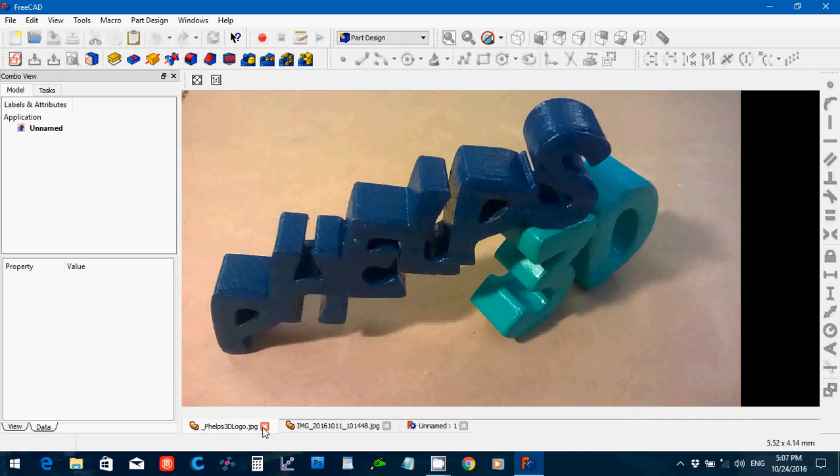Hello, my name is Peter Phelps of Phelps 3D, and in this FreeCAD 0.16 tutorial I'm doing another lesson out of another Solidworks book. This is Engineering Design with Solidworks 2012 by David C. Planchard and Marie P. Planchard.

And we're starting off with the guide rod assembly instruction. Now I'm going to break this up into 3 videos because there's 3 major parts of this, and I just want to show how to design each piece individually for right now. Now I am going to be taking a few liberties with the actual project because there's some stuff that absolutely doesn't make sense to me in the book.

Like, for instance, page 1-64, it's talking about a second fillet that's 10 millimeters, but the width of the item itself is only 5 millimeters. I don't know how to make that happen. Because technically speaking, if I go over 2.5 millimeters, if I even make it 2.5 millimeters, FreeCAD's going to have a fit. It's not going to work. So I'm going to probably set that to like 2 millimeters.

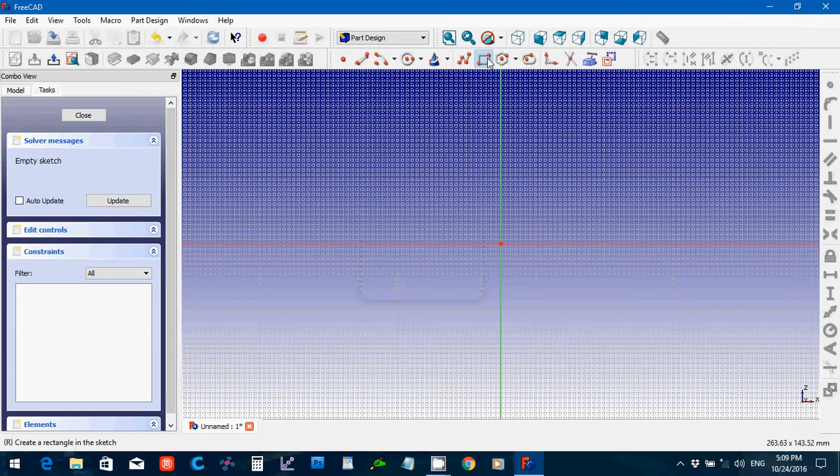Now, this plate is the first part, and its instruction began on page 1-57. And so I'm just going to do this the way I would here in FreeCAD. Create a sketch. I'm in part design. I'm going to do the XZ plane, say OK. I'm going to create a box here. And I'm going to sketch 3 circles.

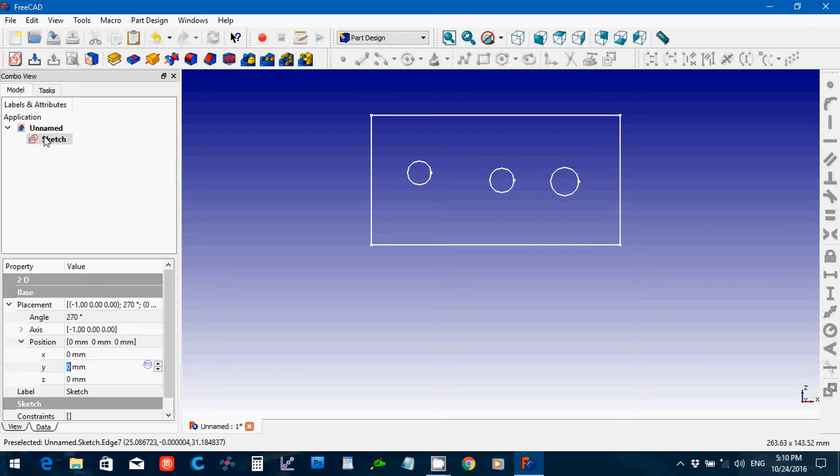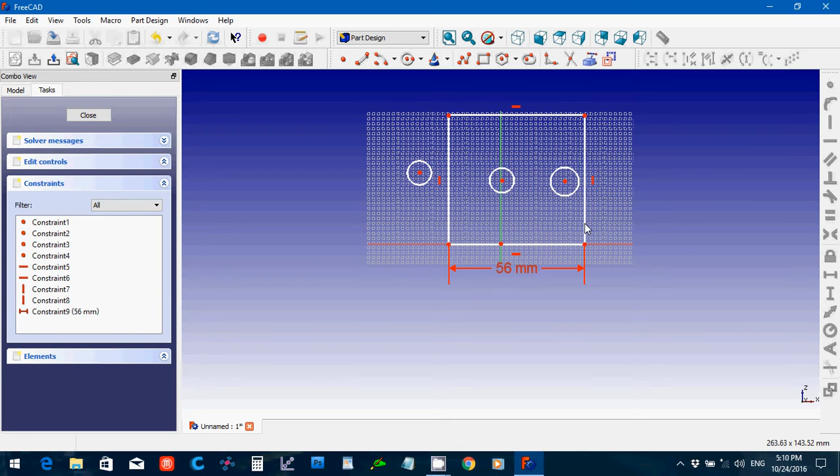Whoops. Double hit the escape. Okay. The length of this is 56. The height of the box, I made it way too big, is 22. I'm going to take and pin that to the plane.

Sorry. Not the line. And I'm going to give that symmetric. I'm going to pin this one to this. I'm going to change its radius to 4. Actually 2. I want it to be 4 in diameter, so 2, sorry.

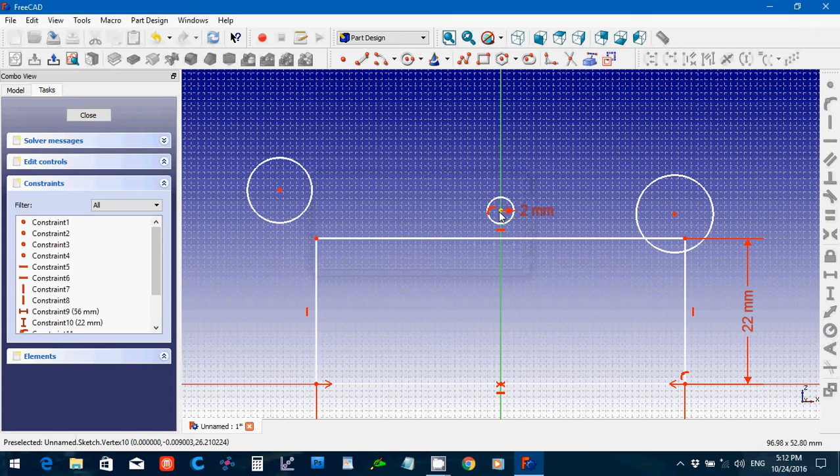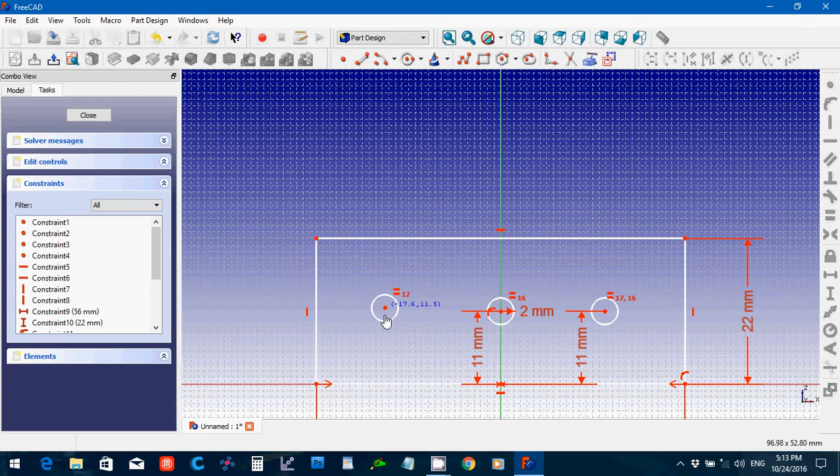Now I'm going to set that one to 11 millimeters in height. And I'll select it, select the other 2 circles with the control. Make them equal. Bring this over here. This, make it 11. Make this one 11.

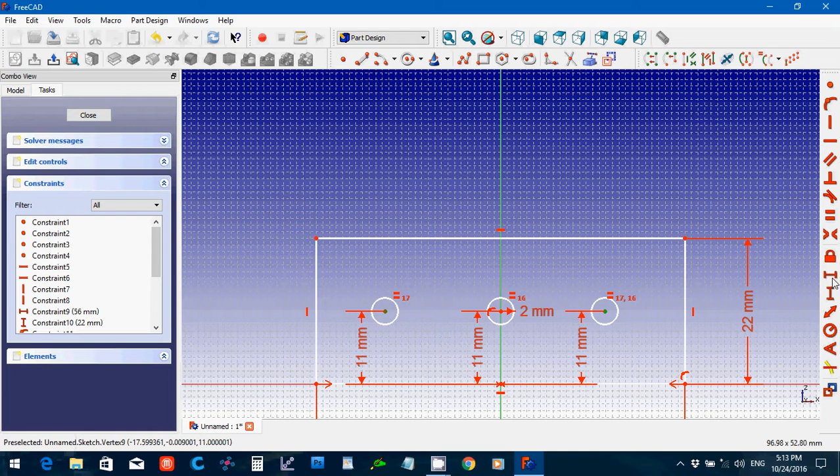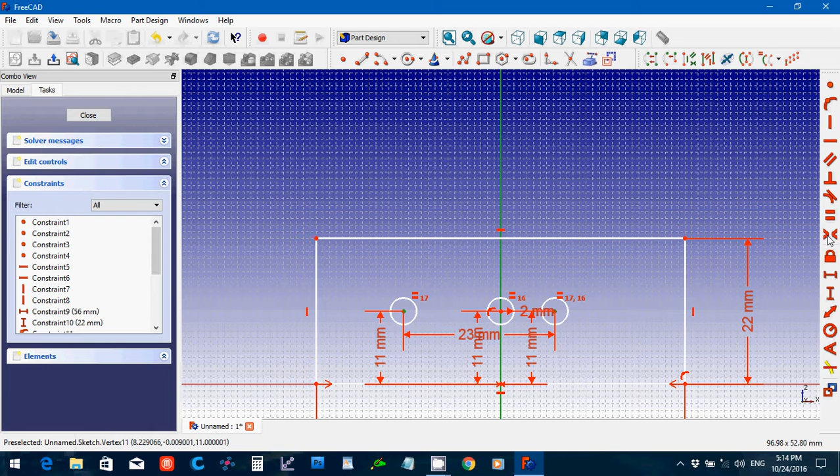Then there's a certain distance between these two. Come on. Symmetric. Okay, close that. Pad this 5.

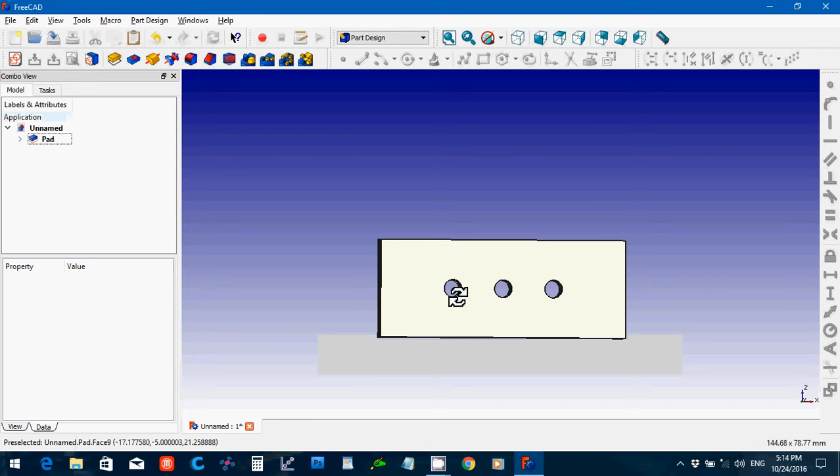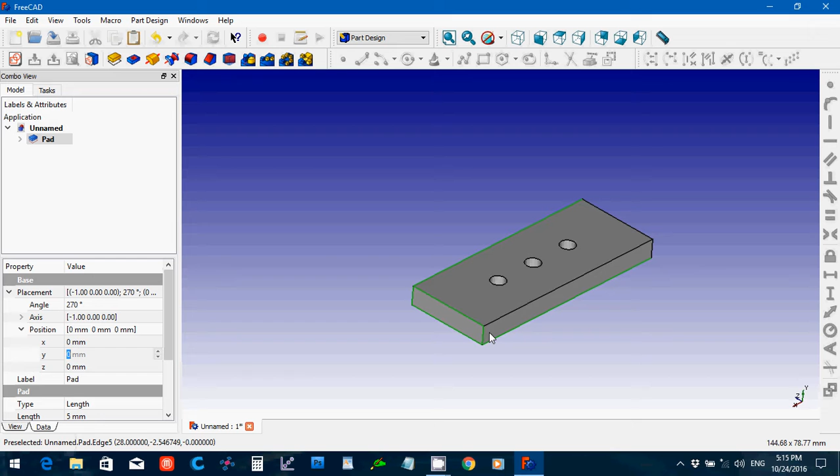And we want to select all the edges except the ones that are part of the holes. Hopefully I've got them all. Okay. And I'm going to fillet them 2 millimeters. Well, okay, let's just go 1. Okay.

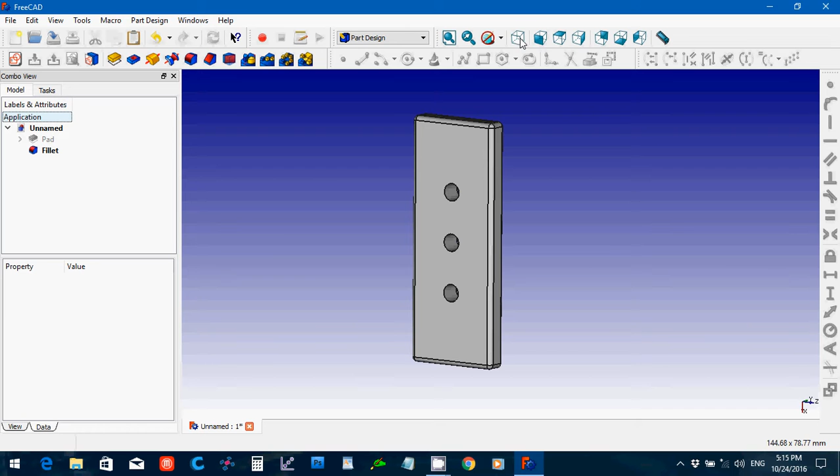Now, in Solidworks, they have a tool that allows them to set holes to specific sizes for different screws and bolts, etc. Now, FreeCAD doesn't have that type of tool, but FreeCAD does have, if you download it, a macro for making different types of nuts and mostly bolts, though. They call it fasteners. And there's actually a workbench you can download, and that workbench attaches to this macro to generate parts.

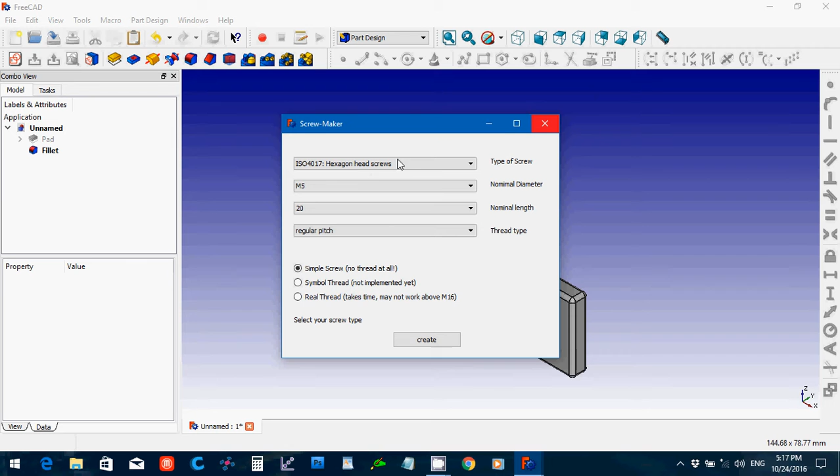So I'm going to give you an introduction to the macro for that. That's the screw maker. I have the 1.7 version, I guess. So I click that, I execute it, and the ones that they're using here, for the middle one, is going to be a flathead screw. They said it's ANSI B18.6.7M, but we're using the ISO numbers here for the screw types. So the closest I could come up with to that is the ISO 2009.

We're going to go M4, and we're going to say 8 millimeters. And I'm leaving it just simple screw, no thread at all, so it's basically a placeholder or something I can use to identify what it is. I don't know what the symbol thread is, it says it's not implemented yet. Real thread works, but it takes a long time to render it, so I'm just going to create the basic screw here. And then I'm going to create another one that I can copy later.

The other two outer holes are using socket type ones. So I'm going to go to socket cap. I'll go M4, and I'm going to make those a little longer, 10, and so this one of course is ISO 4762. I'm going to say create.

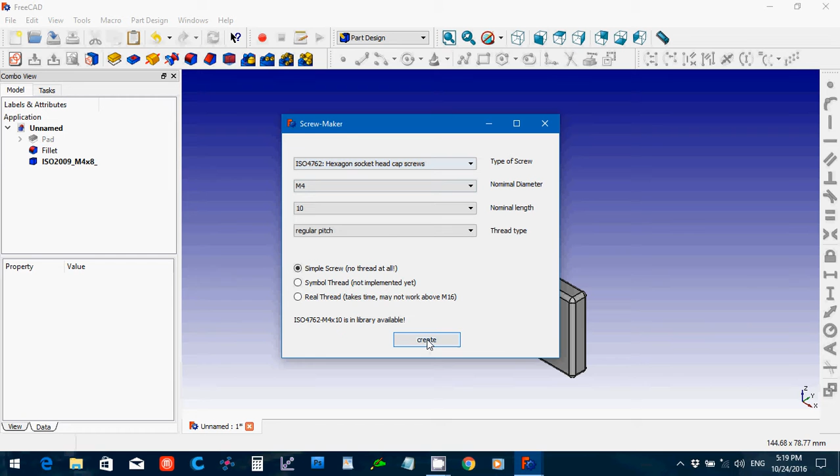Now close the macro, the screw macro, and I'm going to move this up 11. Same with the other one. I'm going to change the axis of it.

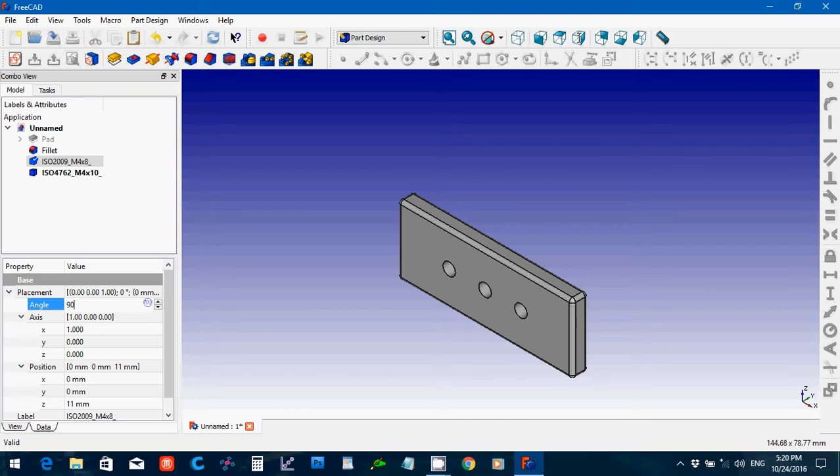Is it 0? And I want it to move on X. And I'm not sure if it's 90 or 270. We'll see. And I should look from the front on this. Okay, I wanted it to 270. The other one though, I will probably want to go 90.

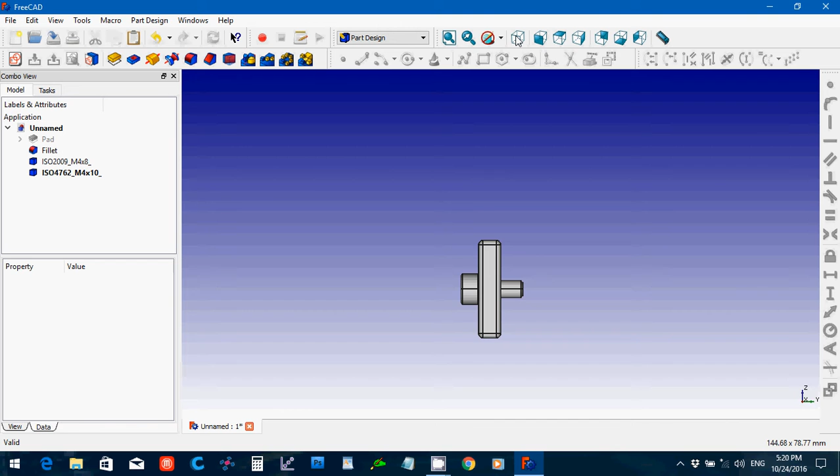And then move it on the Y. Move it 11.5. And I'm going to copy that. And this will go positive 11.5.

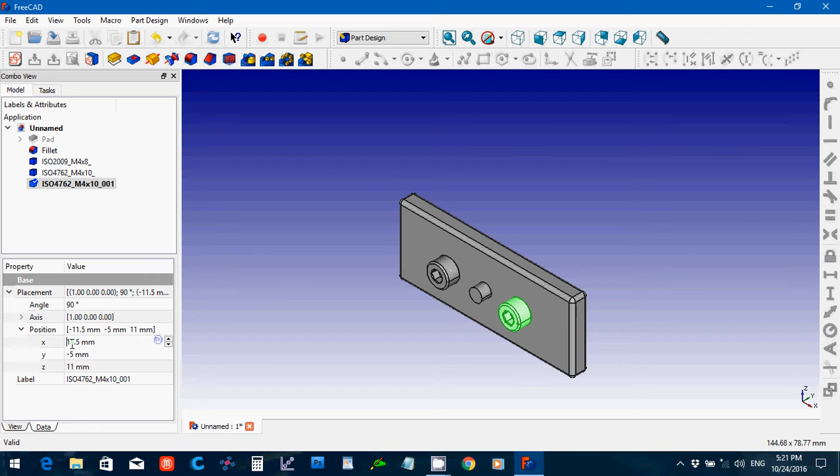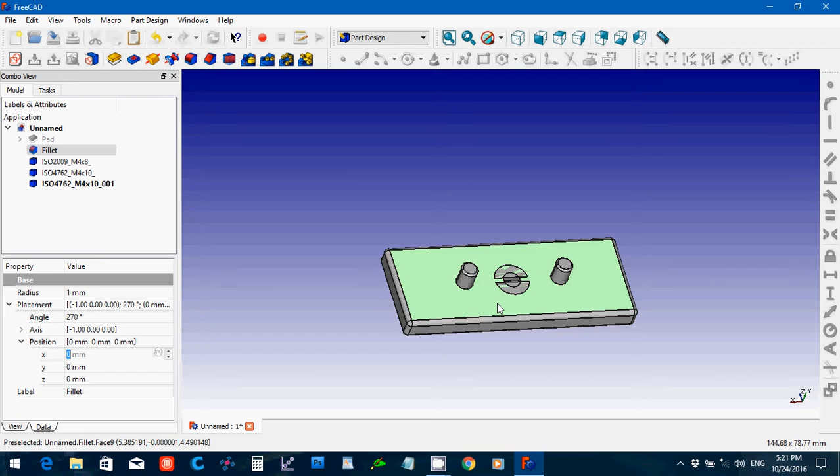Now, the problem here is trying to figure out this. Because you need to taper this to match that, and the best I can figure to try to do is use a cone and try to match the shape of this here. So I'm gonna make this hide for a sec, because this is not like a 45-degree

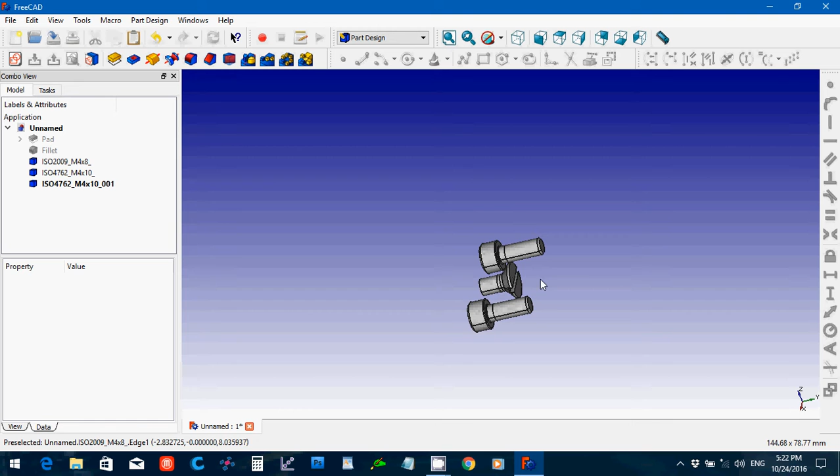cut into it. Now, the reason I don't just take this and cut it is because, well, as you can see, there's a notch in it. If I tried to cut it, it would leave this little block here. It would leave that there, and we don't want that. So, I'm going to go to part, and create a cone.

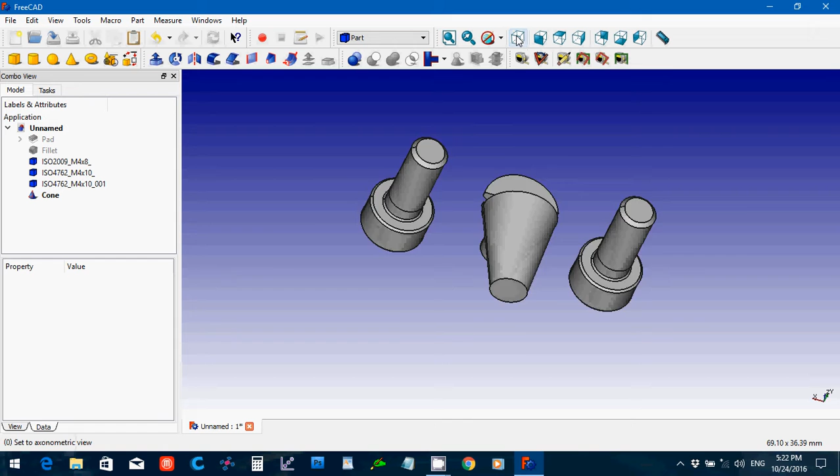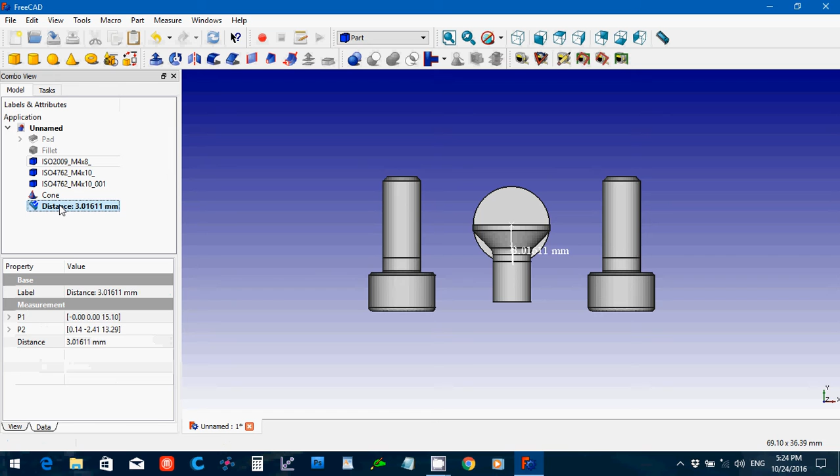Now I know that the inside, the smaller part, is still supposed to be 2, so it can stay that way. How high is the thing? So let's look at the top. It has a fillet on it. Okay. In that case, what I need to do is make the cone here. So that's 3. Okay. So the cone height is 3.

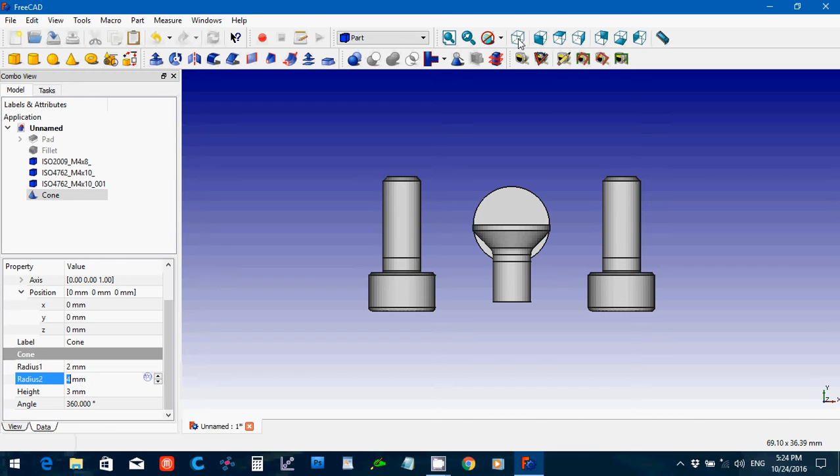Because it has a fillet, I'm going to have to add a cylinder and try to fillet it just a bit to get that same sort of round. But for right now, I'm just going to move the cone into position. Now 270.

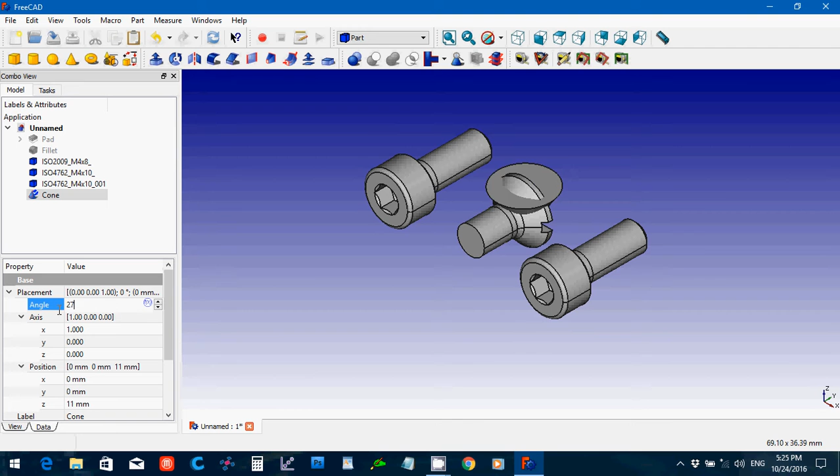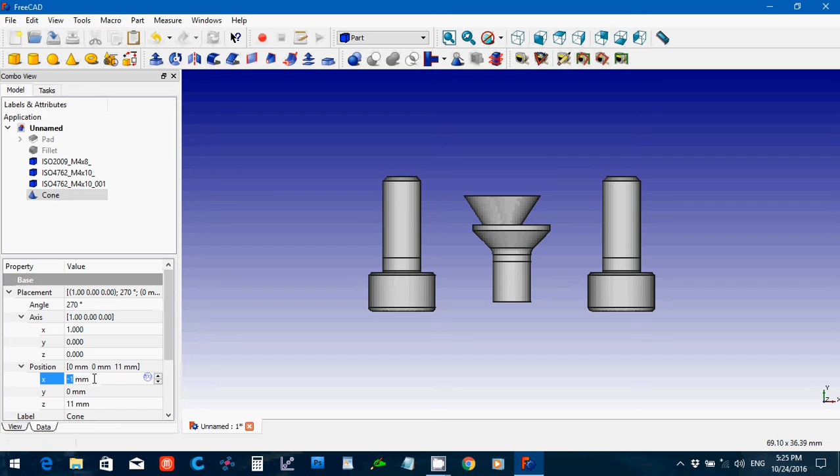Actually, maybe it should be a cone, a cylinder, another cone. I mean, no, cylinder, cone, cylinder. This is the way it's designed. Let's see. This shouldn't have been 3. Come on. Okay.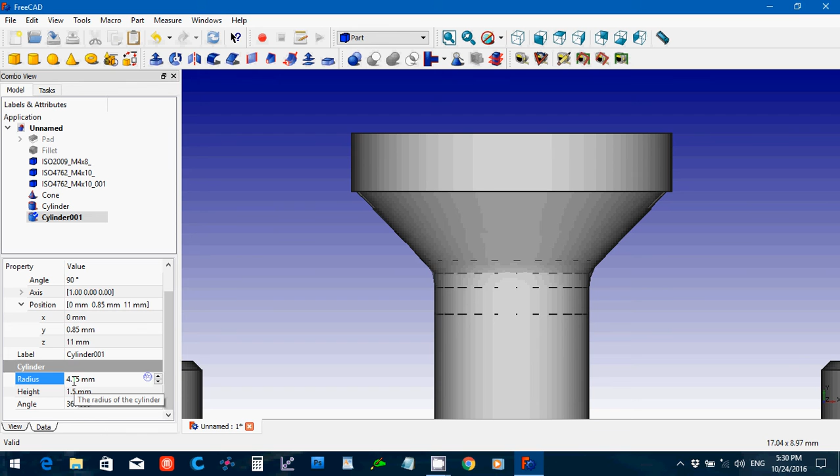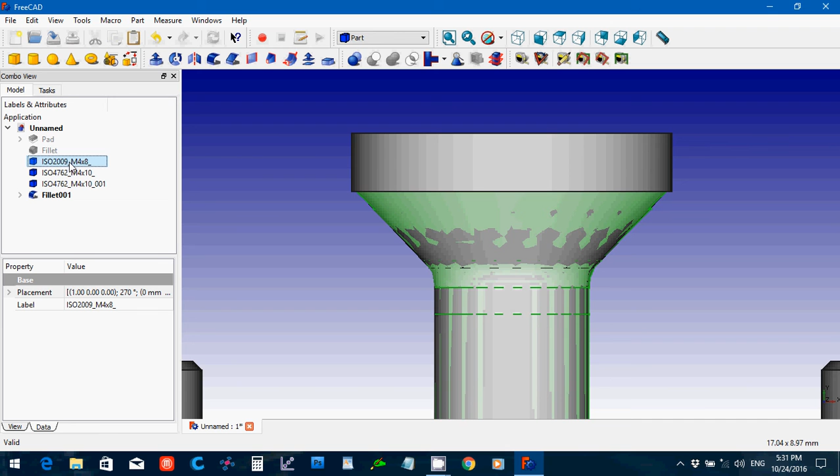Okay, we're gonna fuse all of that together. And just select the screw, make it disappear for a sec. I want to select this line here and fillet it. I think like 0.5 maybe should be good. Yeah, that way we're kind of matching the curvature of the screw.

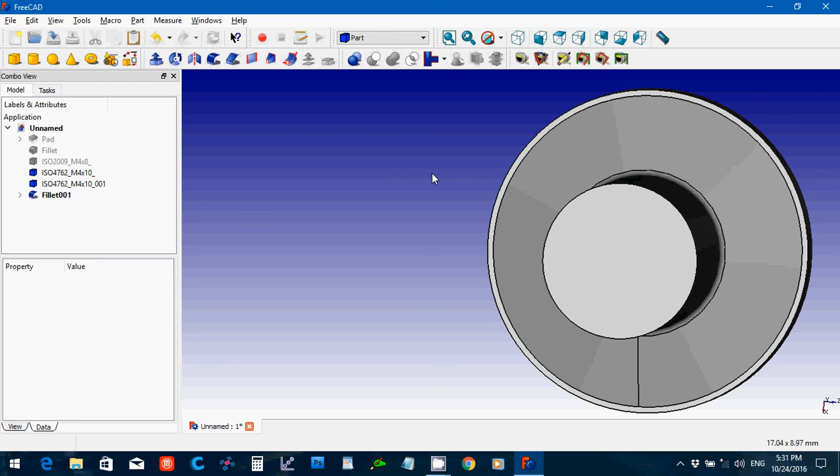Now, in truth, if you were using this to really cut, I would probably add just a bit in the diameter to make it a little looser, because right now I haven't included any real tolerances here. I just, oops. Come on. Okay, and I'm gonna fillet this just a little bit too. Like 0.25. Oops, it didn't like that. 0.2.

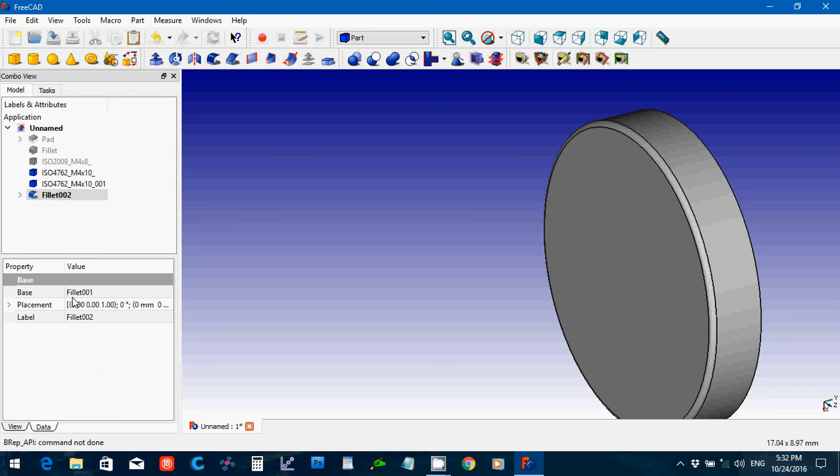Shit. Nope. That's not good. Oh well, forget it. Just not going to do it. I could probably fillet it if I went back, broke it back up, but I don't want to. But really, this is just a guide for the hole that you're going to make.

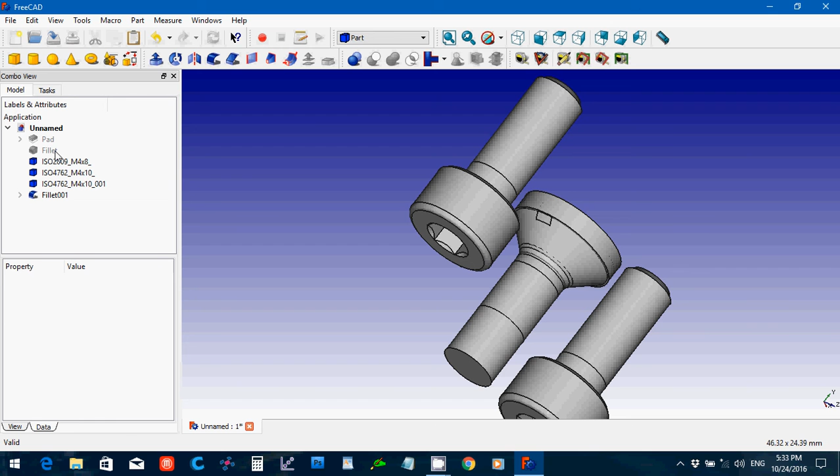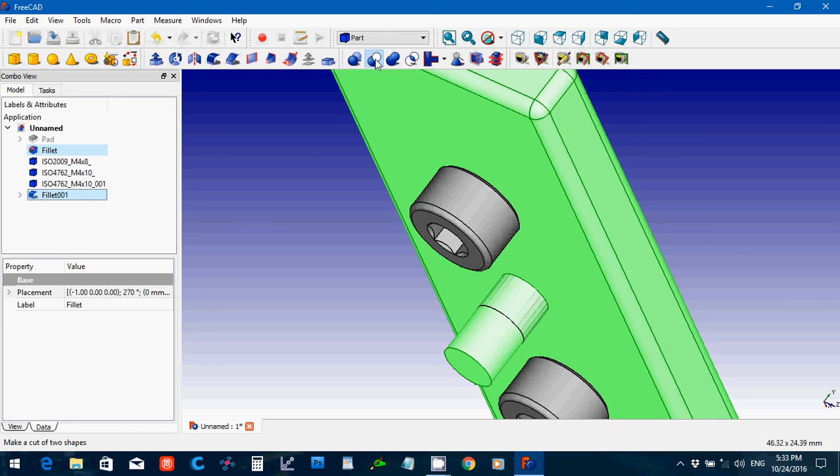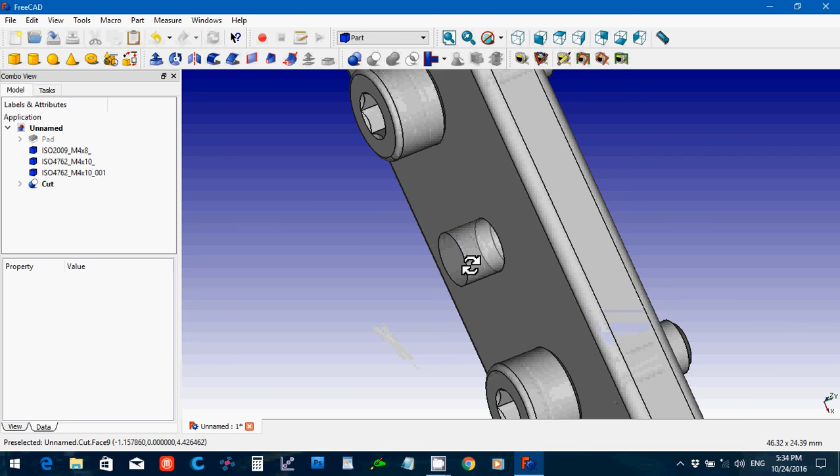Let's bring the fillet back up. And we're going to take the fillet and cut the... now you can kind of see how the screw is sitting inside that. I left the screw as being translucent, 50% visibility, transparency. Okay, come on. So that's going to be the first part of that.

We're going to chamfer this side 1 millimeter. Say okay. Because we're going to be putting a rod we make in part 2 of this video series into that chamfer there. So,

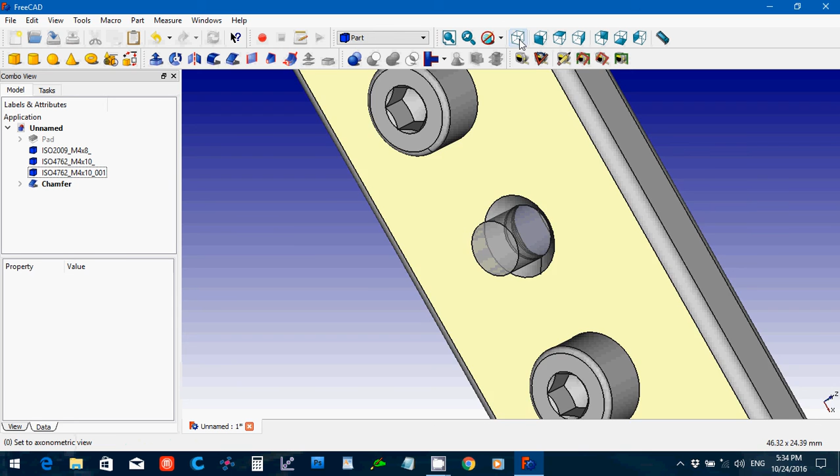file, let's save this, documents, new folder, let's see, engineering designs, Solidworks. Oops. Okay, where'd it go? And I'm going to call the file Guide Rod Assembly Part 1.